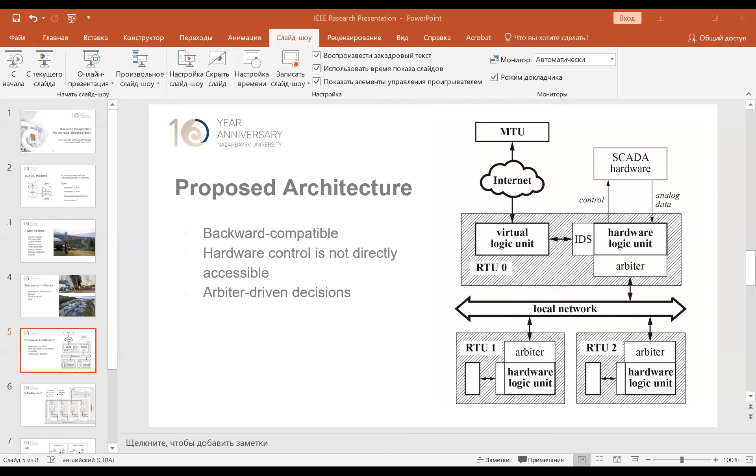I'm sorry, Professor, that I interrupted, but it was really a point that I needed to make right away. We are sorry that you didn't get it. Okay, so you can continue sharing the screen. Give me one second. Alright, yes, we can see it now.

Okay, perfect. So the reason why the IDS is connected to the hardware logic unit is because basically a hacker can intercept the communication between an MTU and the virtual logic unit, or basically what they think is an RTU, and send it some bogus instructions. A couple of attacks that happened in the past relied on that. The hacker was able to intercept the communications and then maybe hammer the valves to bring them out of service, or turn up the pressure in the pipeline to make it explode or something like that.

So the IDS is designed to intercept traffic that will signal to the hardware logic unit to perform something that's out of the ordinary. The way this works is that over the course of some time, let's say a month or so, all of the operations that are happening are being logged to a database which the IDS has access to. Once the IDS detects that something is going on that's out of the ordinary, it severs the connection between the virtual logic unit and the hardware logic unit. So now the hardware logic unit is kind of functioning on its own.

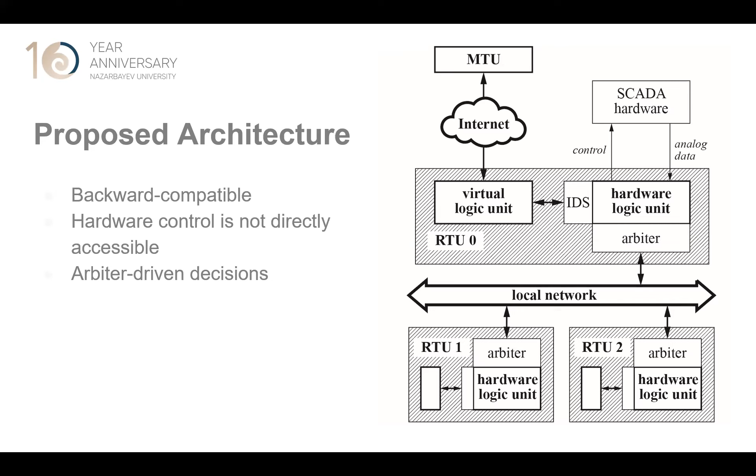As part of the research, we're building something called SCADAville, which is a simulated real world environment that includes a couple of water tanks, valves, pressure sensors, pumps, and things like that. This thing is supposed to emulate a water distribution system within a city on a very small scale, so all of the testing will be done on this system. I've recently applied for a grant, which I'm just waiting to get approved.

I think it's about $200,000 over 2 years. And it's to build the system, to test the software, and maybe improve some of it. So that's basically the gist of my current research.

Like I said, I had some research in computer vision. If you're interested in that, we can certainly talk about that. You can send me an email, or I also do FPGA research as well. So if you have any questions right now, I can answer them about this current branch of research. So please, students, you can write your questions in the chat and we will read them and answer.

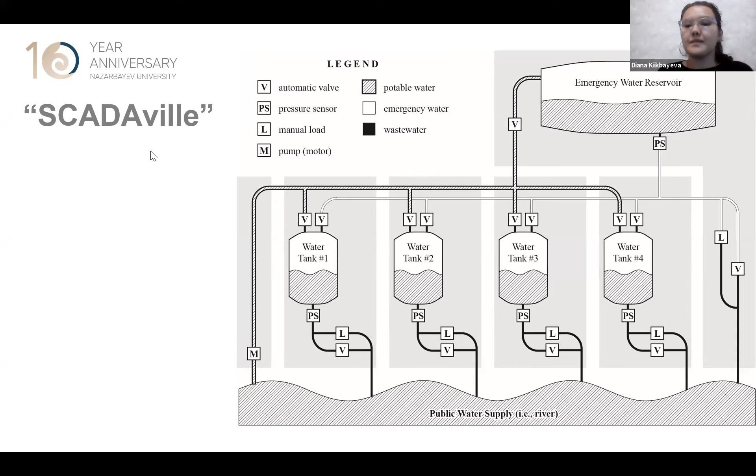Professor, what kind of language do you use when you work with FPGA? So I typically use VHDL just because I'm used to it. But in the past, like when I was in graduate school, I used Verilog. But right now it's mostly VHDL.

So another question is, what is your computer vision research about? So mostly it was for traffic, so traffic detection, counting, and things like that. That was in my PhD program, under 2 grants. And once those were wrapped up, I went on to more aerospace fields because Embry-Riddle, where I taught before, was mostly an aerospace engineering school.

So there we had a wind tunnel where you could basically visualize low-speed airflow. If you were to put a model of an airplane or a model of a wing in there, then you were able to generate smoke streams that you could visualize. Now, it's very challenging to quantify those things. The researcher takes a picture, and somebody very well versed in the field looks at the picture and says, well, this is good. But there's no way to mathematically quantify the performance in the actual wind tunnel.

So my computer vision research was about capturing those smoke streams, and they're actually really cool. If you Google smoke stream wind tunnel, you'll find some really cool videos. Out of those videos, I had to extract data points, see how continuous those smoke streams were, whether they were turbulent or laminar, and based on that, generate some kind of a numerical answer that I could assign to a design.

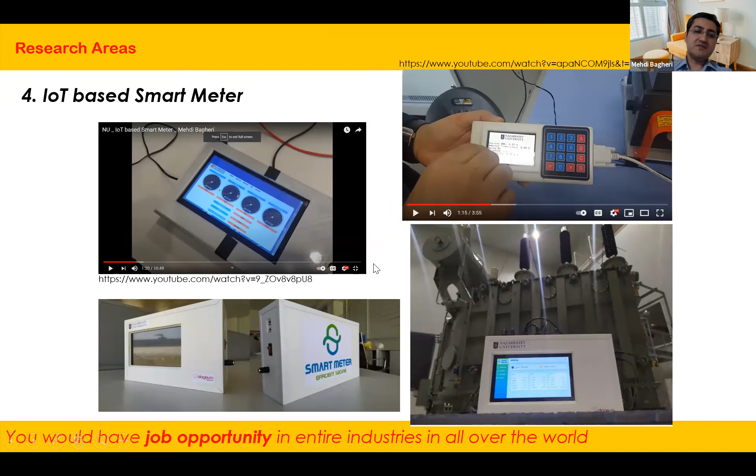Sorry, I'm going very fast because I don't have that much time. They have given just 30 minutes.

In terms of the smart city, we are working on a real-time air pollution detection system using artificial intelligence. I have a commercialization grant right now. We have an open position in this system, which is going to detect and forecast air pollution using artificial intelligence, and pollution distribution monitoring. We're going to develop a device. That device would be implemented at each and every bus station. And we collect all the information from different bus stations. And then we have an application which can tell you in real time how much pollution there is in some part of the city.

Therefore, if you have a heart problem, if you have asthma, or if you have children, the application can simply tell you whether this part of the city is a suitable place for breathing, or you have to leave this part of the city. It would be able to give you the warning and all the information. So we have a team right now, 6 people working in a commercialization project with me on this specific case, and we developed the first setup, the electronic transmitter system, and of course the initial application. This is one of those projects which is demanded in the country.

I remember that I think it was 2 years ago that we had a bushfire. Not a bushfire, it was a fire. In Almaty, and it was creating a kind of smell, and some people became panicked. So if this system was available there, people could exactly monitor where the source of that fire is, and they could manage their stress.

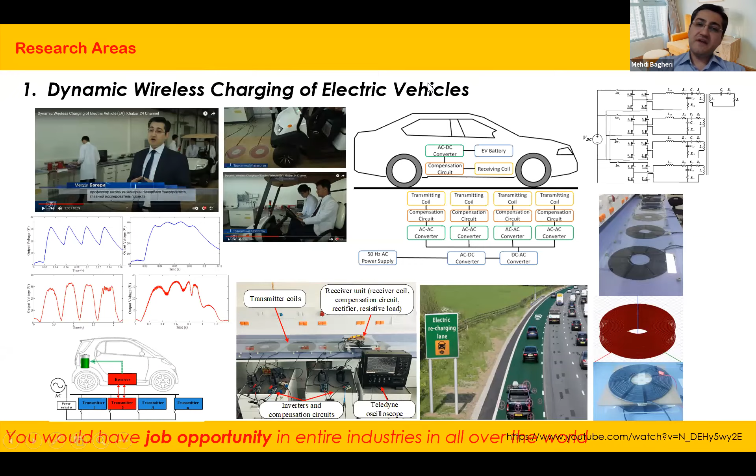However, we can address the coupling with the shape of the coil, with frequency, or we can change the transmitter coil from the segmented shape. It's a segmented coil: 1, 2, 3 segments. We can make it a continuous coil. If you have a continuous coil under the ground, as some people propose, then the coupling problem would be fixed. The pulsation would be fixed, and we can just play with the frequency.

Yes, okay, thank you.

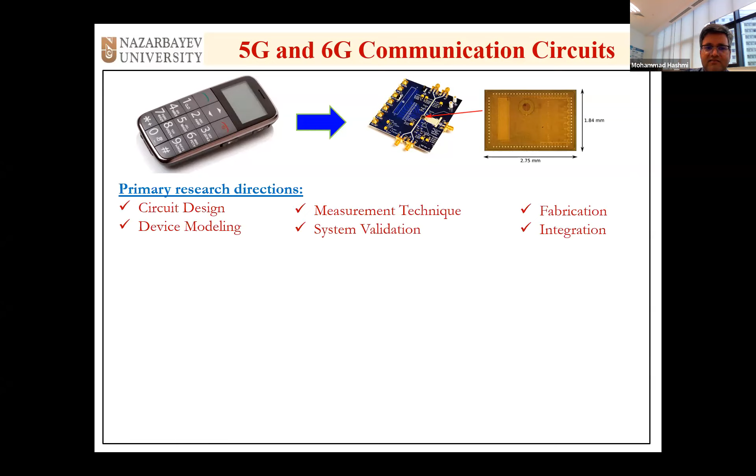We do circuit design, we do device modeling, as others the world over do. Then we also do measurement techniques. Once we design these circuits, it's also important to develop some mechanism to measure them, since there are no standard ways to measure. They are all evolving at a rapid pace.

Then we do system validation. For example, we developed some components, we combined them together, and we try to validate whether we are getting whatever we wanted to achieve. So we try to combine them and see if our efforts are really making sense. Then we also fabricate circuits. We then do some integration scenarios as well.

For example, we develop some circuit, we develop its model. Those of you who have slight ideas of LTSPICE and those types of simulators, they are low-end simulators. But for these high-end designs, we have to use high-end EDA tools. Within that EDA, we have library components, libraries, packages.

So in integration, that's what we do. We develop these circuits, circuit models, then we integrate them in the EDA platform to make it useful for a wide range of communities across the world. So they are all open source.

Say, for example, in circuit design, what do we do? We design various types of circuits in our lab, or we do some layout stuff. This is a component for multi-frequency circuits. This is an example for a switch - we developed some switches for high-speed 5G circuits.

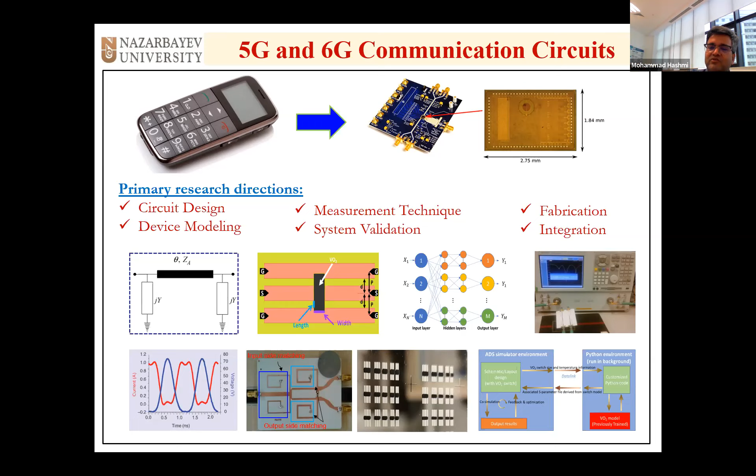In advanced antenna techniques - nowadays you go anywhere, even on the internet, you will see 5G, small cells, small cell Wi-Fi, and signals going out. But what are those? They are antennas actually. Without antennas, all those depictions are redundant.

And if you go further, even in the United States, I was just looking at some of them - even lampposts are being used for antennas for signal communication, 5G antenna. You can see different companies - AT&T, Verizon, Sprint, T-Mobile, and many others. So those antenna techniques are developing antennas for 5G and 6G.

So the first question that can come is: what is happening with existing antenna techniques? Actually, they are not really useful and effective for 5G and 6G centric communications. Why? The idea is antenna is a key element, but they should be extremely efficient. But the existing antenna techniques available in literature are useful for frequency ranges and data rates that conform to 4G applications at most. Even their sizes are big.

And now we are talking about 5G, we need miniature antennas. Antenna is a key element. Antenna should be efficient. Antenna should be miniature. Antenna should be adaptive, since in 5G you have a variety of frequencies and your antenna should be adaptive to them automatically on the fly. And antenna should be omnidirectional. It is easier said than done. So these are the requirements of 5G stuff.

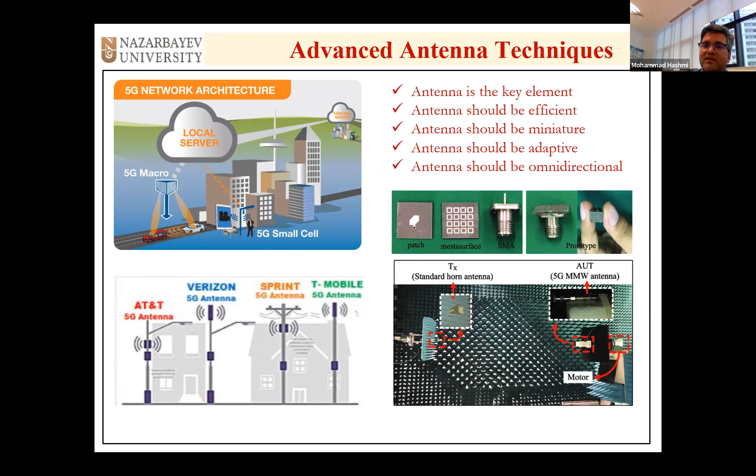Moving forward, one of the buzzwords nowadays is wireless power transfer.

Especially you see wireless charging happening around the world, especially in big cities like London, Singapore, Tokyo. They have charging stations, and they call it wireless power transfer. But believe me, even with all those successes, and they are at lower frequencies anyway, they are still not mature. They are maturing, even at those high power levels. And at higher frequencies, where you have mobile phone techniques and all, these are still in infancy.

And that is only wireless power transfer I'm telling. But if you want wireless information and power transfer, where you do not just transfer power, you also transfer information as well, and they are really required in applications like wireless body area networks, for example, where doctors want to monitor the patient's health. So it's called digital health, electronic health.

In those things, let me give you a scenario where some patient has pacemakers. Earlier it used to be battery based, so every 7 years they used to operate and put another battery system. After that, wireless power transfer came. Even before that, there were rechargeable batteries placed, and then you had wireless power transfer, so you charged them. But the problem was the existing technique is very high power and they burn the flesh of the patients, so they are not really mature.

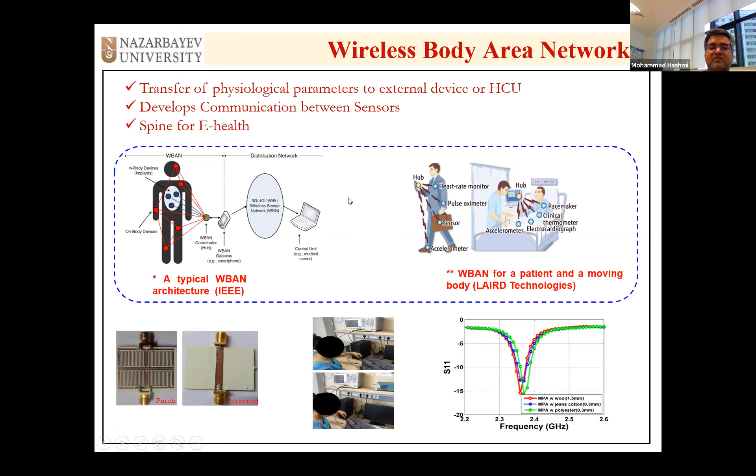So lots of applications are there. We are contributing in on-body sensors. We try to develop, and some of the applications, actually even the prototype is in our lab. So we have done some sensors. You see, it looks very big, but it's actually the magnified version, it's very tiny. We developed some sensors for wireless body area network.

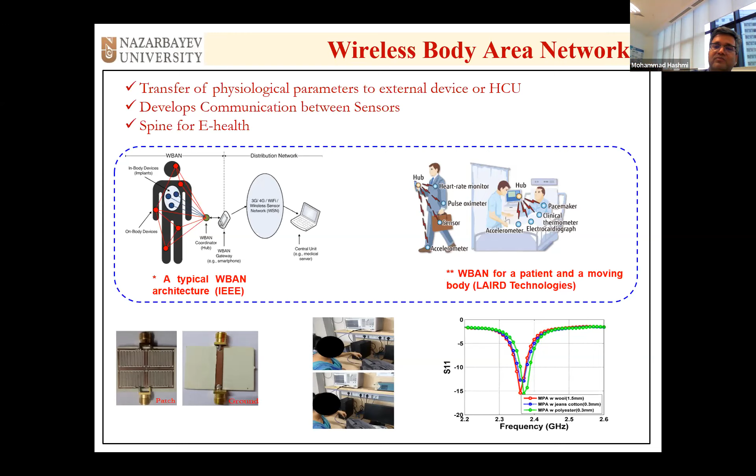So this is one domain where lots of opportunities exist, even within Kazakhstan, since it's actually a very green country for these sort of applications. Like nothing has happened, so whatever you do, you are bound to be successful if there is some success with your prototype and designs. Then we also contribute in IoT security and trust. The reason, and the first question is, why do you want security with your IoT devices?

Answers can be given in n number of queries and responses. We do not want to be cloned. We don't want to be impersonated. We want safety mechanisms for our devices and data, since nowadays your financial data, your personal data, they are all on your devices. We don't want to be defrauded. Once somebody gets an idea and inkling of our data, they can impersonate and misuse it. Anything can come to your mind, you can think, okay, I am being compromised. Cyber stealing is actually a big mafia nowadays. So these are some of the many questions that can come up to your mind.

And in order to address some of these, say for example, even our bank cards, they especially have RFID within them, and they're not really secured. Anybody can clone that.

So a number of buzzwords you will hear when talking about IoT security: hardware Trojan, FPGA based PUF. PUF is physically unclonable function. Then embedded PUF, validation with NIST standards. NIST standards come from the United States, National Institute of Standard and Technology. These are all buzzwords, but when you go in, you will find there are many branches and challenges.

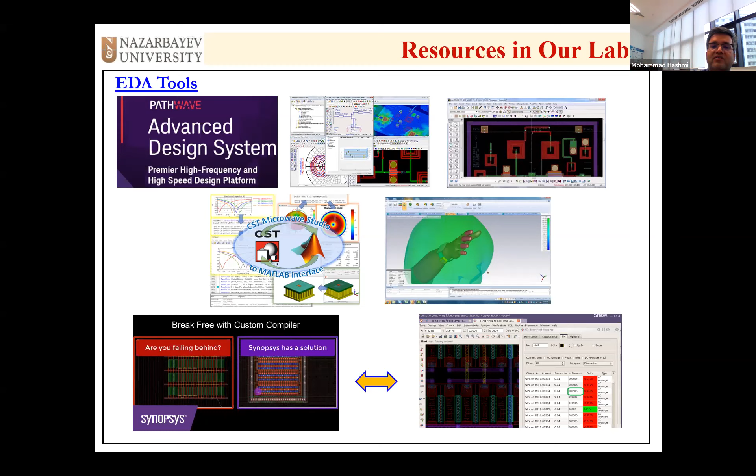And then we have lots of instruments and fabrication facilities in our lab. Those of you who are interested, you can visit them as well, at least have a look at what these instruments do. So we have this circuit fabrication. It's through our engineering workshop we do it. And all these instruments are in our lab, 223 and 222 in C4.

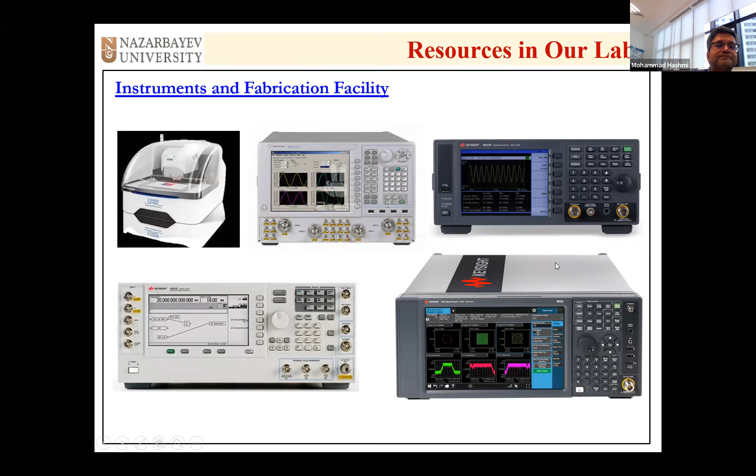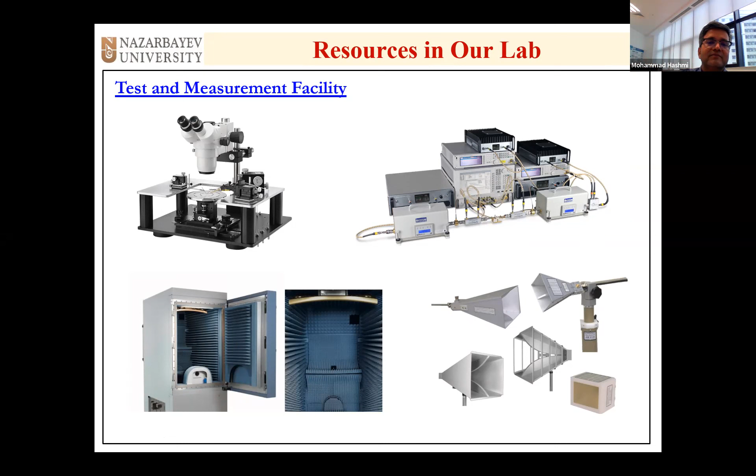We also have this wafer probing system in our lab. We have this system characterization facility, this antenna measurement facility, and antennas also for system performance evaluation. This is all in 223, 225, 222, 224. So we have lots of instruments and software tools, and our own server is there. Through that, we keep track of our own EDA tools and their usage as well.

And of course, without the help of our key collaborators, it is almost next to impossible to do all this. So we work very closely with Ghalam and Gharysh Sapary in Astana. Then we have collaborators from Canada, Saudi Arabia, Singapore, Japan, China, USA, and some UAE professors as well. Some of the students, after doing their bachelor's, have moved on to their laboratories for master's and PhD. Since they now trust these students, once they apply, they get additional favors.

And finally, for your career, if you choose circuits and systems, where will you end up? Study is one thing. Potential career paths: even within this country, you have lots of opportunities for systems engineers in the oil and gas sector. If you are an expert in circuits, systems and sensor networks, you can directly work in oil and gas, IT companies, telecom companies. Then you have the aerospace center, Gharysh Sapary, and Ghalam; they really need people with good expertise. The Ministry of Defense also needs lots of people with expertise in circuits and systems.

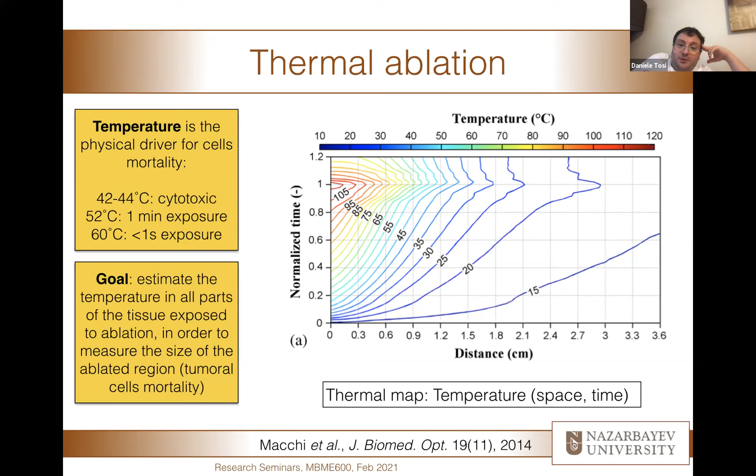As you can see, we render the temperature by estimating how each part of the tissue is exposed to a different temperature variation. The central part of the tissue reaches very high temperatures, while the temperature tends to decrease on the bottom. Believe it or not, this is done with only one fiber. One single teeny tiny fiber, and we have enough data to get this type of thermal map, which estimates the temperature as a function of space and time.

But we haven't stopped there. We have been able to evolve our setup by using multiple fibers that have specific scattering properties. I'm not going to go too long on that, but they are quite rare types of fibers that are able to create sensing networks. So in a single scan, you detect hundreds of sensors displayed on a plane. The sensor works along the distribution of the fiber, and by having multiple fibers, you can measure the temperature

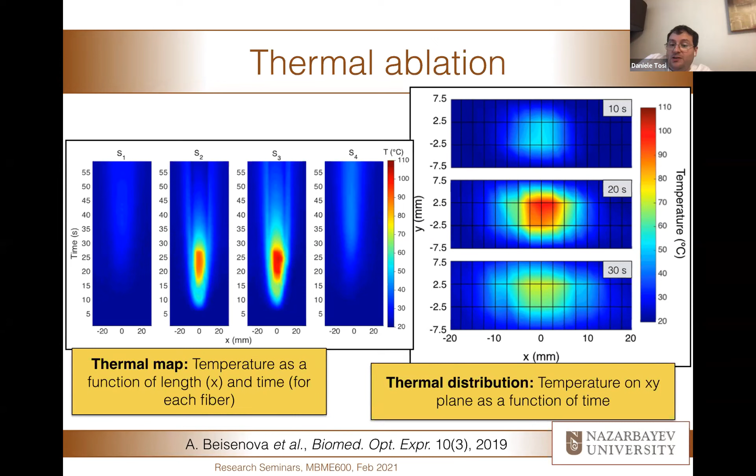So that's basically extending 4 teeny tiny fibers into a sensing system that has performance compatible with and very close to imaging. They are even better in terms of accuracy. They have very close resolution, for example, to the most advanced MRI. We're talking about machines that cost millions of dollars. And here is a video of how the system is working.

In the first chart, as the heating goes on in real time, you see the heat propagation. In 25 seconds, the whole tissue has been heated up. By analyzing this chart, which we can acquire in real time, we can estimate how much of the tissue we have treated to 60 degrees or higher, which in this case is the curve here that surrounds the tissue. We can also measure thermal gradients to study heat propagation problems.

This is a measurement that we have performed in 3 dimensions. With 12 fibers, we have been able to measure the heating of the tissue in 3 dimensions. So the charts become very complicated, as you can see. We decided to cut some planes to show you the heat propagation and the position of the applicator. We post-processed the data, but it has been acquired in real time.

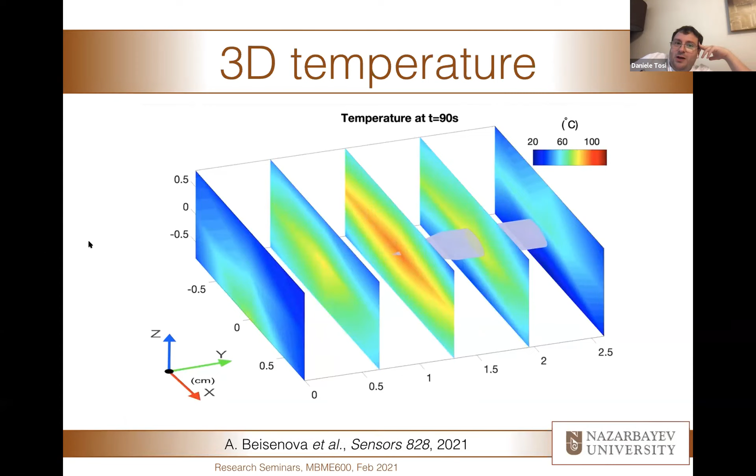Now look how nicely you get the rendering of temperature with these sensors. We downsampled the data just to show you, but there are more planes. There is basically 1 plane every 2.5 millimeters.

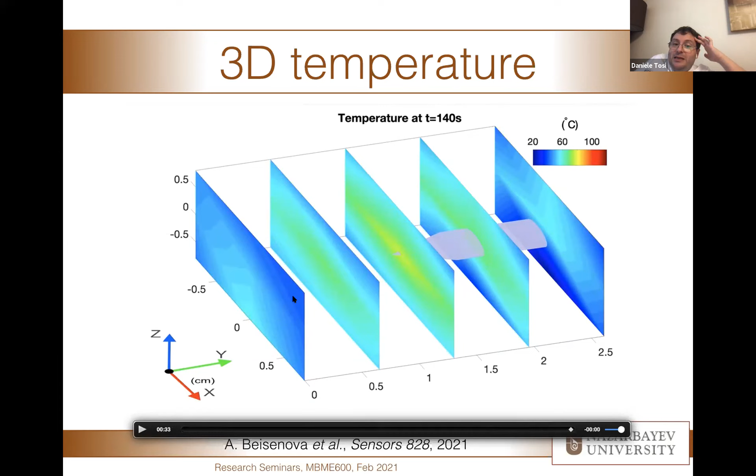Lately, we have also tried to change the properties of the tissue by using nanoparticles, the so-called nanoparticle mediated ablation. We have nanoparticles that deposit in the tissue at specific locations, and with their specific absorption, they improve the performance. This is work we recently reported using a laser ablation setup, where we ablated the tissue using a laser, deposited nanoparticles in the tissue, and studied how nanoparticles affect the ablation process.

Let's go to the next stage of our research. We said that we can do physical sensing, and temperature is one part of physical sensing, but strain is another part. So we have been trying to design shape sensing technologies that, using multiple fibers, specifically 4 mounted around a needle, are able to convert the strain into multidimensional data and reconstruct the shape of the needle in real time.

And we have been using that to create a guidance system for epidural anesthesia. This is the scenario in which we operate. So the needle that we have drawn right here is about 8 centimeters long, and is a needle used in epidural anesthesia, the same as the ones used in clinical procedures.

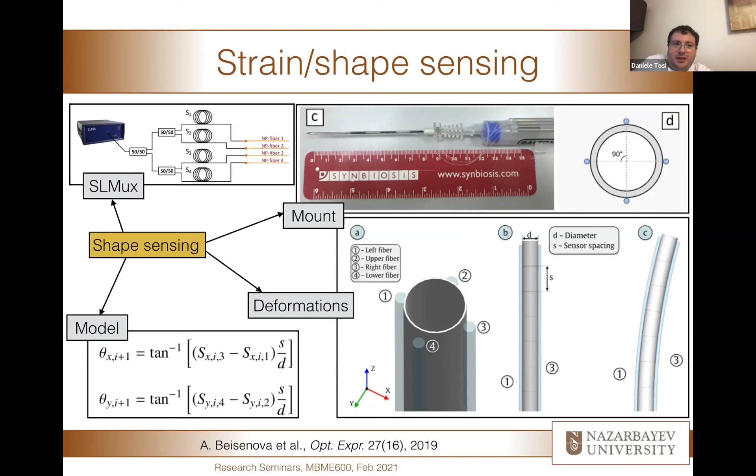And we went further with our current prototype that has 4 fibers, left, right, up, and down, which has a much simpler operation, at least in terms of the calculations that we are doing. And by converting the strain into the shape with a trigonometrical model, we can reconstruct the shape in real time. Here is how it works.

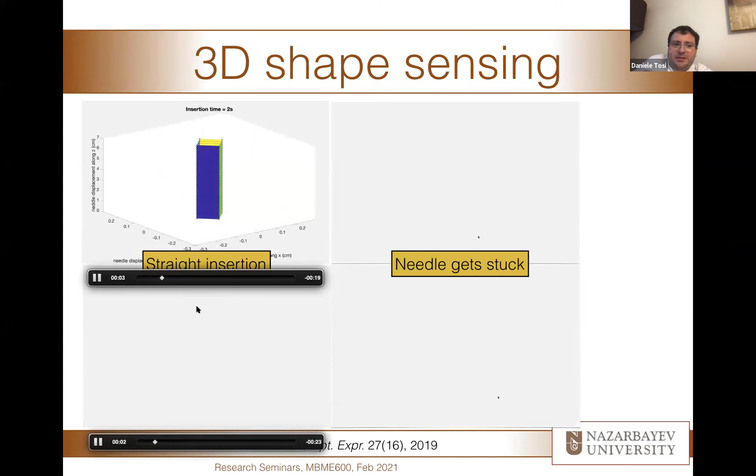Here there are 4 videos that basically show the same type of insertion. On the left, a straight insertion. On the right, the needle gets stuck. You will see on the upper screen the zoomed view of the needle, where basically we have an exaggerated needle, and on the bottom part, the real model of the needle, which is very thin.

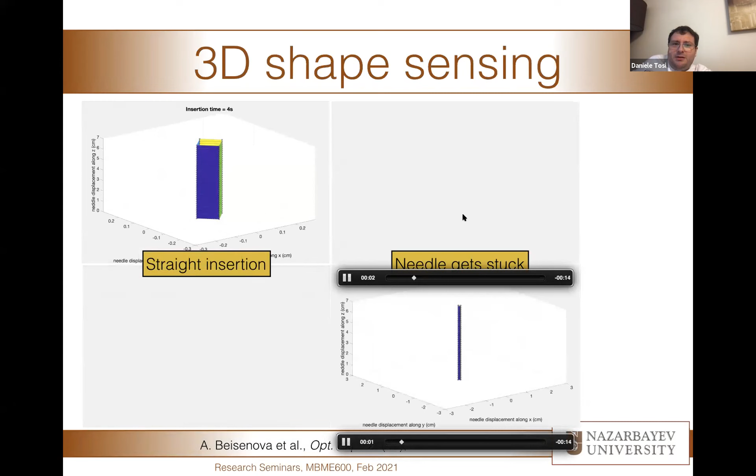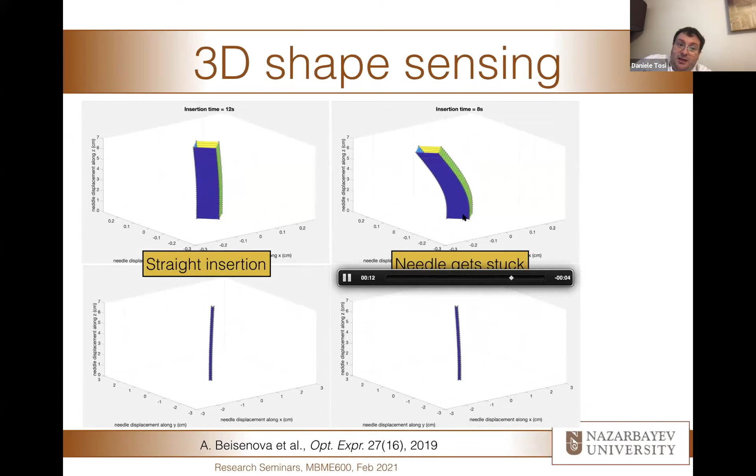And as you can see in real time, I will show it one more time, you are able to view the shapes. Okay, there is some delay in the start of the needle, but I think you can see right now the shapes the needle is taking. Notice that despite the very tiny bending, in the bottom part you have the model in scale. Our system reconstructs the shape in real time. This is one of the most advanced works that we are doing right now and is based on 3D shape sensing.

So we talked so far about detecting physical parameters, but what about detecting biological parameters? Can our sensor do that? And the answer is yes. So we design biosensors, and biosensors detect in a selective way analytes that are biological, such as biomarkers or biomolecules, and in some work even antibodies. There have been several methods that have a rapid and repeatable fabrication, and this is one of the aspects that our group is specifically working on. We biofunctionalize the sensors. So we combine the expertise in optics and in the fabrication of the devices with expertise in biology on how to specifically functionalize the sensor and evaluate that the sensor is effectively detecting.

So why use optical fibers? That's because the fibers can have an easy way of fabrication. They can operate in situ and they can operate in vivo. Remember, the fibers are very small. The fibers are biocompatible, and the optical sensors have a limit of detection that is totally unmatched by any other technology. So we can detect concentrations that are ridiculously low.

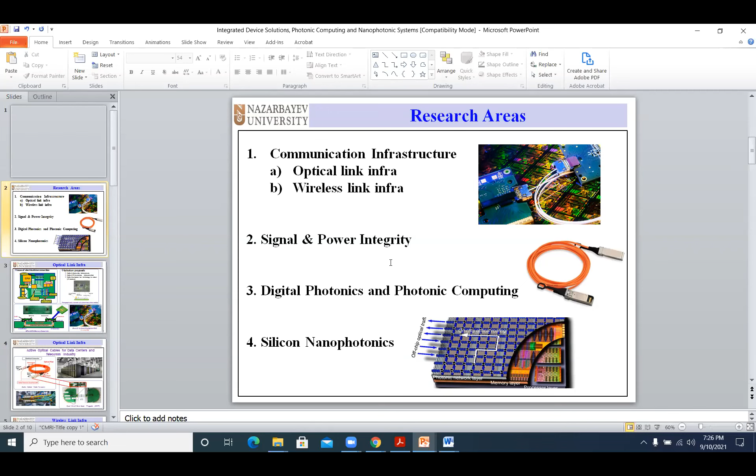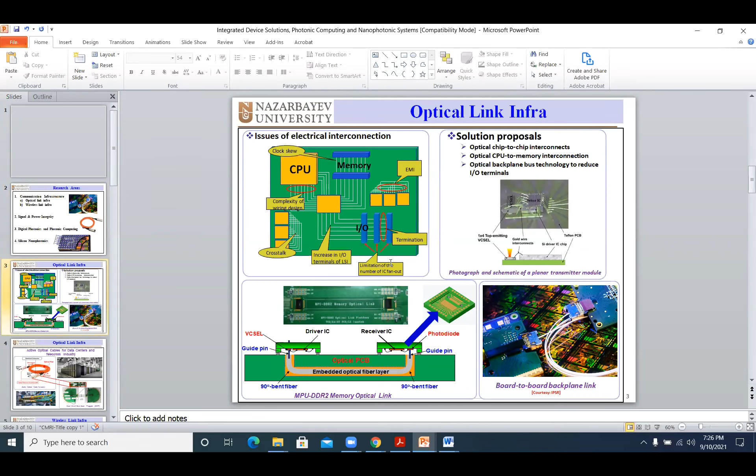The first part of my research is communications infrastructure, divided into 2 parts, the optical part and the wireless infrastructure part. Then we have signal and power integrity, digital photonics, photonic computing, and silicon nanophotonics. For the optical link infrastructure, the focus is mostly on short-range optical interconnects. If you look at your motherboard, you have a lot of chips there, CPU, memory, and other components, all connected together using copper links, right?

As the operating frequency of these processors increases, we start to have issues in the electrical lines, such as crosstalk, electromagnetic interference, and a lot of other issues. The solution is to replace these electrical links with optical fiber or optics. Why optics? Because optics has immunity to electromagnetic interference, immunity to crosstalk, and other advantages, as well as low power consumption. So the solutions offered here are optical chip-to-chip interconnects, CPU to memory interconnects, and so on.

So basically, if you are trying to introduce optical links in the motherboard of a computer, for example, you don't just lay the fibers or the waveguides in the motherboard, because the signals coming out of the CPU going to the memory and vice versa are in the electrical domain. So we need to find a way to convert from electrical to optical and vice versa. Because of this, we need to develop some kind of transceiver.

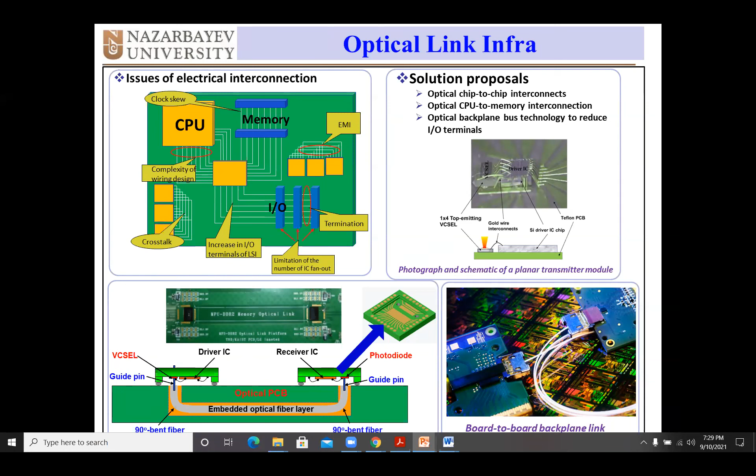Still part of the optical link infrastructure, we have what we call active optical cables. In the previous slide, I mentioned the optical PCBs. We have companies that are leading in this; one of them is IBM. Back in the day, we had some projects together with IBM where we helped to develop these optical PCBs. Now we're looking at active optical cables for data centers.

We know data centers host a lot of data, and they have to be able to transmit data at very high speed. So we use optics to interconnect the computers, the hard drives, and so on in these data centers. These connections are made thanks to active optical cables, which just contain transceiver modules at both ends.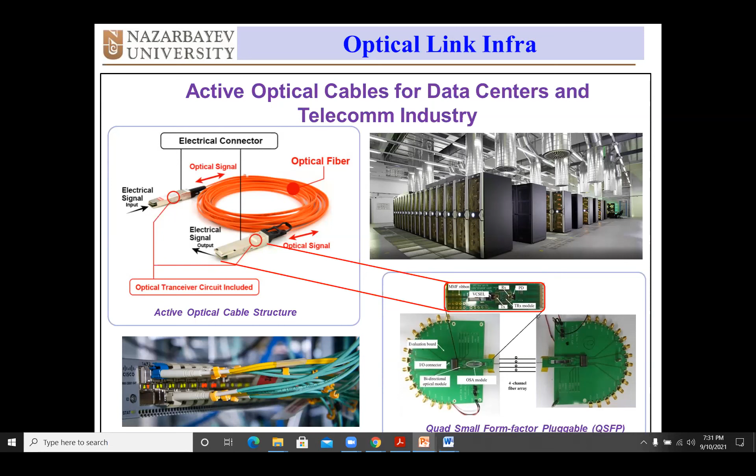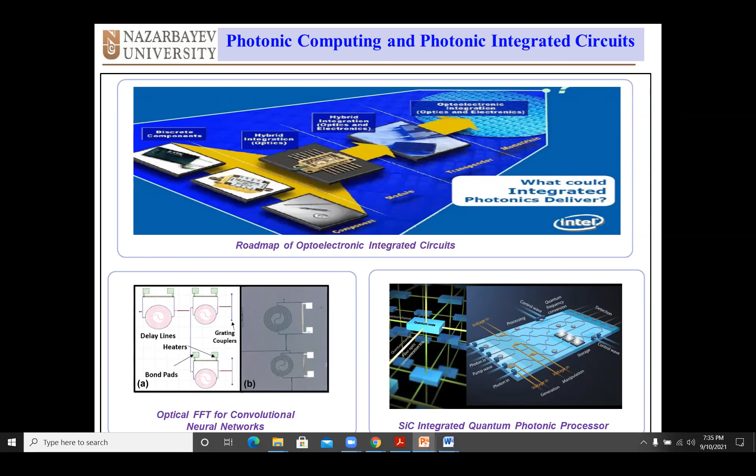So what are the applications of what I do in my laboratory? It's very broad: consumer electronics, IoT, high-speed computing, AI, unmanned aerial vehicles, image sensors, and so on. I have a couple of projects that are ongoing.

We have a project on 40 gigabits per second memory access solutions for the next generation of computing systems. This is an ongoing project, started this year, for 3 years. If you're interested, please contact me. We have another project.

This one is energy harvesting units designed for perovskite solar cells, with applications for IoT devices. This is already another ongoing project. We are also designing energy harvesting units for building-integrated photovoltaics, also getting harvested energy from perovskite solar cells. So this is another project.

This one is an MOE project, and it is ongoing. We have a couple of other projects going on, and a lot of partners. We are working with a university in Nanjing, and with KAIST. So if you join my research group, you have a chance for internships at any of these places, China or Korea. We also have a planned project on development of an AI-integrated linear frequency modulated photonic radar for autonomous vehicles, which we plan to do in the future.